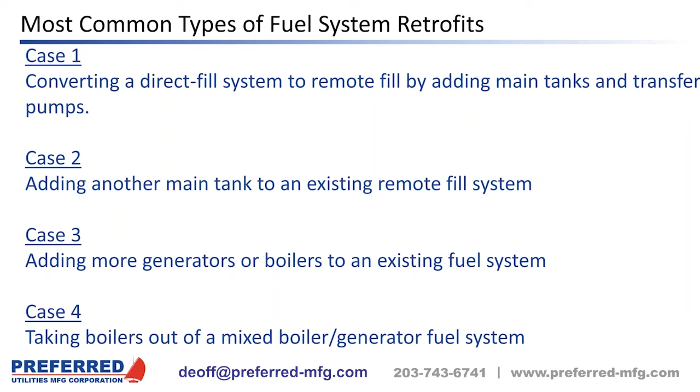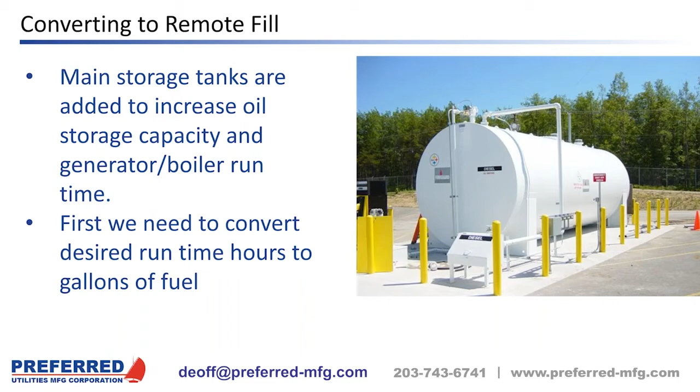The first thing we do is convert the desired runtime hours to gallons of diesel. It's an easy calculation, but people unfamiliar with tanks might forget that you can only fill a main tank to 90% full, and there is some oil at the bottom of the tank that isn't usable either, since the drop tubes don't go all the way to the bottom. Preferred has a web app that makes this calculation even easier—you enter the generators and their kW, the desired runtime, and the percentages at the top and bottom of the tank you can't use, and it tells you the nominal tank gallons you need.

Then you need to determine how many main tanks to use. One large tank is the most economical and may hold enough fuel, but there are reasons why you may want more tanks. The first reason is redundancy—there are a few things that can go wrong with a main tank to make it temporarily unavailable, so two tanks are more reliable than one. Also, available real estate—it may be easier to fit more smaller tanks than one large tank, even if it's a little more expensive. And finally, there may be transportation and rigging issues—it may be impossible to get one large tank to the site and into position, so you'll have to use two or more smaller tanks.

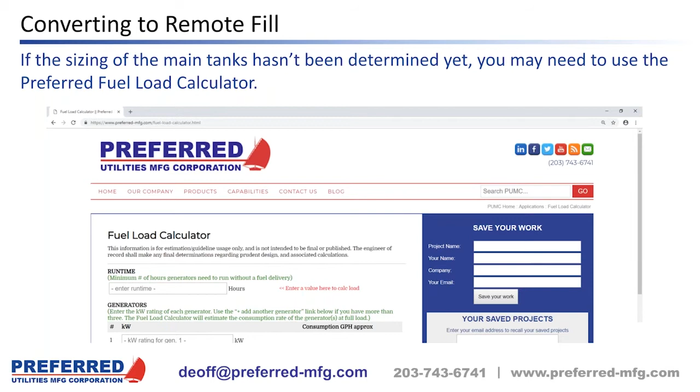Here's where you can find the preferred fuel load calculator. Again, it's not brain surgery, but this app does this calculation for you quickly and easily.

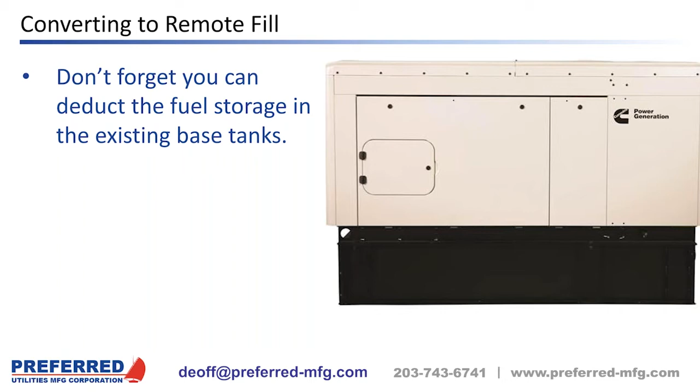When you are calculating the amount of diesel you'll need to meet your runtime requirements, don't forget to include the oil in the existing day tanks or belly tanks. A project I did last winter involved adding two 20,000 gallon main storage tanks to a facility that had 2,500 gallon base tanks. 2,500 gallons times 6 generators is a lot of fuel, and you can subtract that off your runtime hours. However, all this fuel didn't get them through the February freeze last year, so they decided to add main storage tanks.

So we know how big our main storage tanks need to be, and we know how many main tanks we're going to have. Next, we need to size the transfer pumps that will pull the fuel out of the main tanks and push it into the generator day tanks or belly tanks.

Generators consume about 7 gallons per hour for every 100 kW of capacity, or you can just multiply the generator kW by 0.07. You want to apply a generous safety factor because you want to be able to top off a day tank or belly tank relatively quickly and let the supply pump cycle off. Preferred will typically apply a safety factor of 3.0 to 4.0 on top of generator consumption, then calculate how long it takes each pump to go from the 50% pump-on level to the 80% pump-off level, and make sure we can top off a tank in a reasonable amount of time.

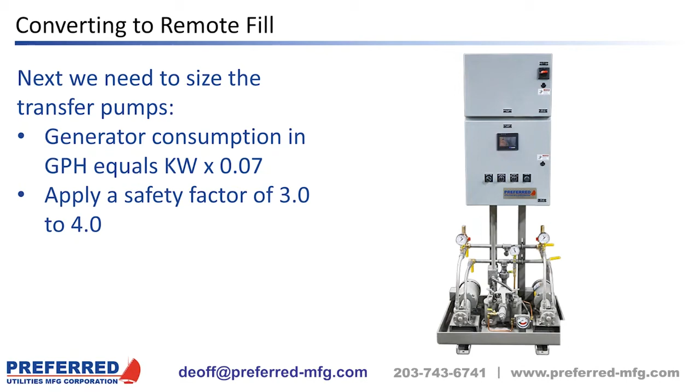Don't forget, we're talking about relatively small motors, and there's not a big price difference between one pump size and the next size up, so don't be afraid to apply a generous safety factor to the size of the transfer pumps.

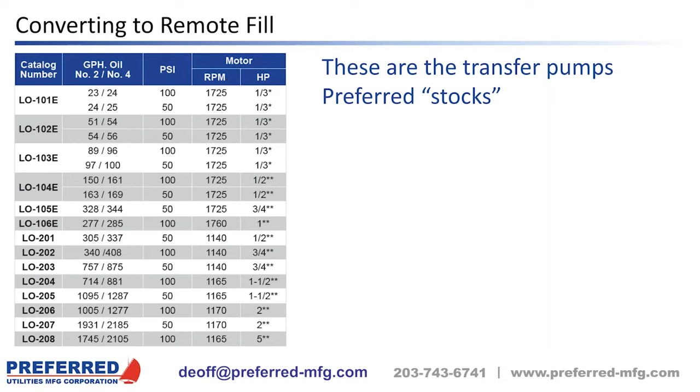Preferred catalogs and tries to stock pump sets from 23 gallons per hour up to 1931 gallons per hour. We can make larger pump sets, but they're just not in our catalog. We also have rotary screw pumps available for high-rise applications. So these are the available pumps that we can use for an off-the-shelf pump set.

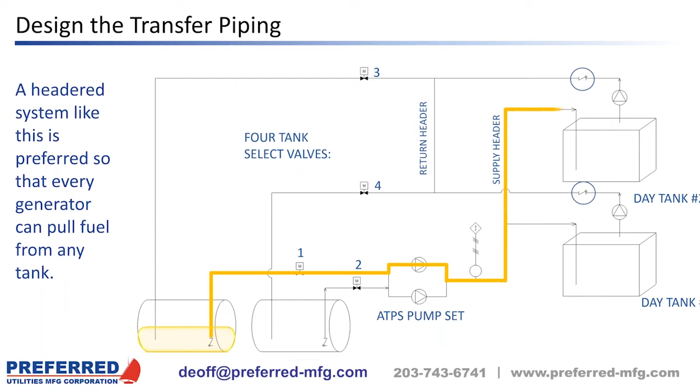Now that you know the size of the transfer pumps, it's time to design the fuel transfer piping. The diagram here shows how we would like to see the transfer piping done. Each day tank should be able to use either pump, and it should be able to pull fuel from either main tank. This way, a failure of a single pump or single main tank doesn't take down the generators.

Tank select valves, usually motorized ball valves with end switches, determine which main tank is in service. We always want to pull from one tank and return to the same tank. This way, we can't use the fuel in one tank to overfill another tank.

We have customers that say they want to be able to equalize the level in multiple tanks, or just want the ability to move fuel from one tank to another. However, our customers that have lived through long generator runs have found the best sequence is usually to pull from one tank until it is nearly empty, then switch over to another tank and call a truck or several trucks to fill the low tank. Then if they have a filtration system installed, they polish the tank with the new fuel before they put that tank into operation. Just in case you get a bad batch of fuel, which happens very, very rarely, it's a good idea to polish new fuel before you use it.

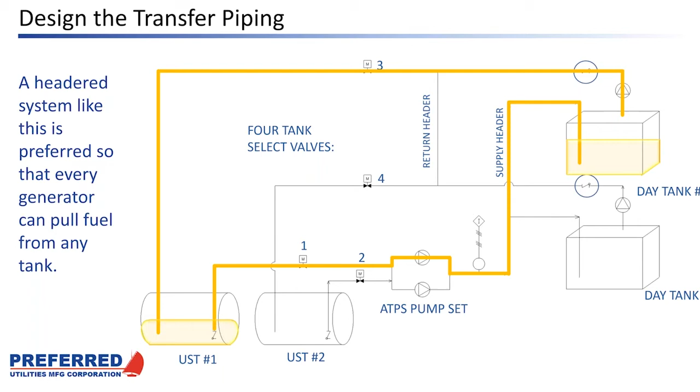This sequence makes it more likely that a customer will be able to accommodate a full truck and all of their fuel is polished before it is used, and it keeps the fuel turned over. After Hurricane Rita, a preferred customer in South Texas was on generator power for 14 days using this exact sequence.

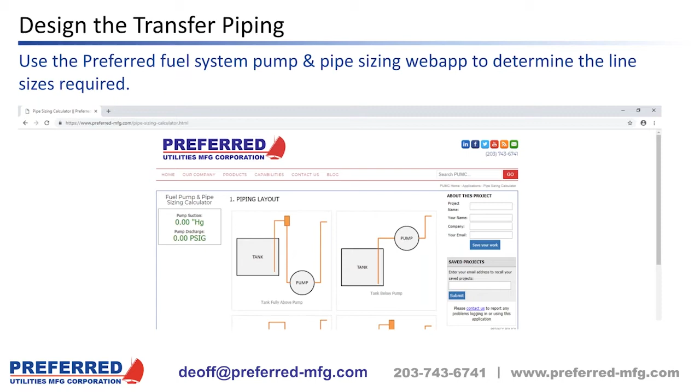So you can use the preferred fuel system pump and pipe sizing web app to help determine the size of the suction lines, discharge lines, strainers, and anti-siphon valves for the new system. You can find the preferred fuel system pump and pipe sizing program by Googling preferred sizing calculator or preferred pump and pipe sizing calculator, or as Dwight Schrute would say, search engine preferred pump and pipe sizing calculator.

So one other detail on the piping is we're going to need to add flow control manifolds to the day tanks, because before, when they were direct fill, the truck driver would pull right up to the belly tanks and fill them. The diagram shown here is the most basic form of flow control manifold.

If you like, you can build on this by adding a second solenoid valve. You can replace the solenoid valves with motorized valves. You can add a flow strainer. You can add a flow switch, or you can add a sight flow indicator. But what you see here is the most basic type of flow control manifold.

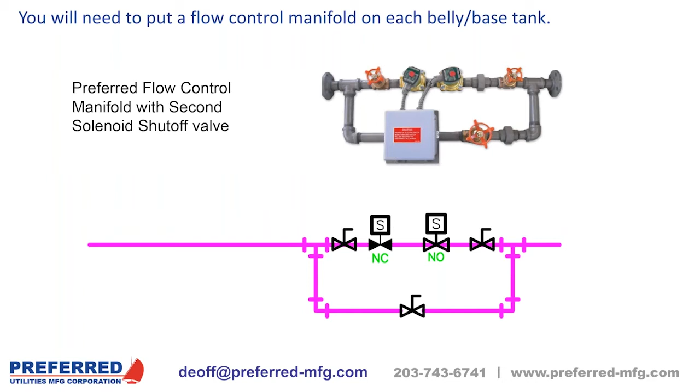The 3-valve manifold around the solenoid valve is very important. It lets you replace a solenoid valve without interrupting fuel supply to the generator. It also allows you to open the bypass valve and put a pump in hand to fill a generator in the event of a controls failure.

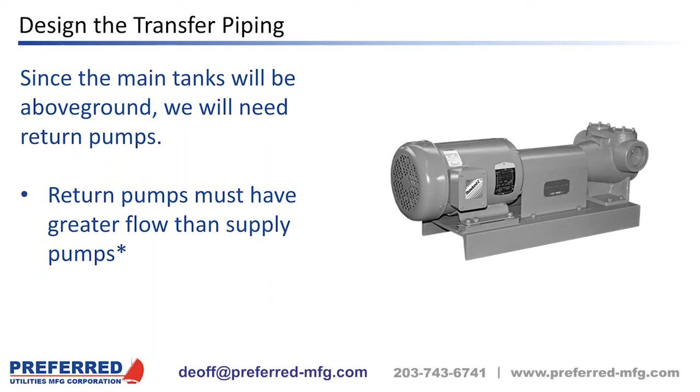I've never done a retrofit like this with underground storage tanks, so most likely you will be adding above ground main storage tanks, and gravity return won't work, so you'll need to put a return pump on each belly tank. These are the return pumps preferred offers. In most cases, the 15 PSI discharge pumps will work, but you should check the pressure required to get the fuel back to the main tank.

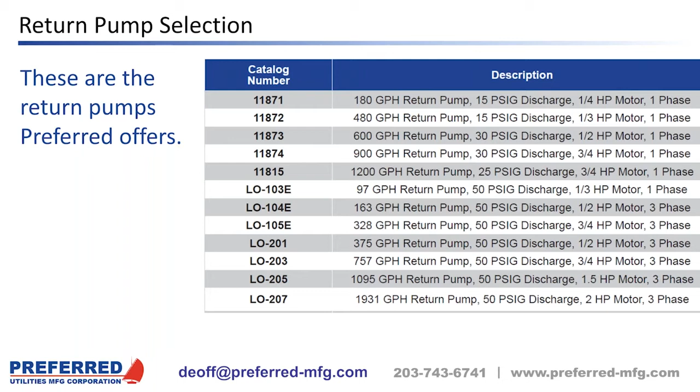If you have any vertical distance between the belly tank and the main tank, that might put you into a 50 PSI discharge pump. But if everything's on the same level, you can usually get by with a 15 PSI discharge, smaller pumps. Pumps and piping come naturally to us mechanical engineers, but the controls involved in a fuel system retrofit can make or break a retrofit project. Belly tanks or base tanks sold for direct fill applications usually will not have enough float switches for remote fill applications.

Most companies supplying pump set controls, Preferred included, will not reuse existing belly tank float switches and controls. Often day tanks come with a little control package that might close a contact to let a pump control system know the day tank is calling for fuel. In most instances, Preferred will insist on putting our own float switches in the tanks. Overfilling a tank is a big deal, and we put a lot of thought into how we prevent overfills.

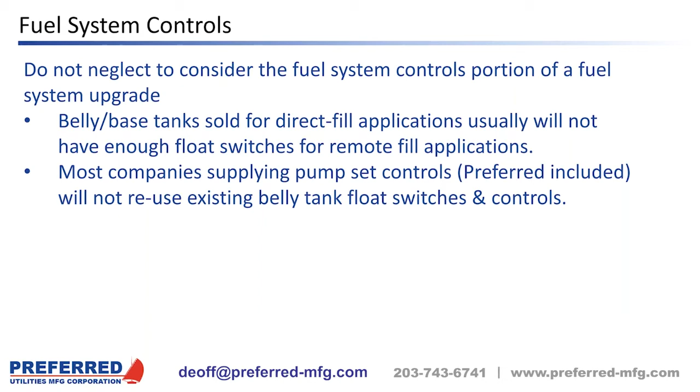This is the outline of the sequence Preferred uses for filling day tanks. When the tank level gets down to 50%, we bring on a supply pump and open the fill valve and start filling up the tank. At 80%, the fill valve de-energizes, and if no other day tanks are calling for fuel, the supply pump shuts off. If the fuel level gets to 90%, we sound the alarm, energize the return pump, and hardwire de-energize the fill solenoid.

We hardwire de-energize the fill solenoid just in case somebody's got a pump in manual, and we can turn off the pump regardless of what anybody has done to the controls. If the fuel level gets down to 40%, we sound the alarm and energize both supply pumps to increase the flow of fuel to the day tank.

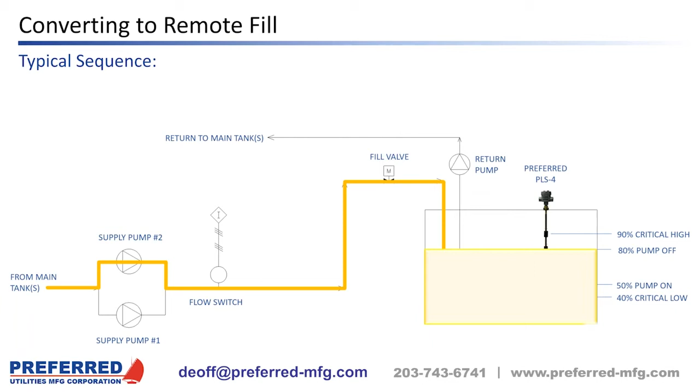For a retrofit, the key is we need 4 float switches in the belly tank. Most belly tanks purchased for direct fill applications will not have enough float switches for remote filling. And the OEM float switches are sometimes really cheap plastic assemblies we're afraid to reuse.

So Preferred is going to insist on putting our own version of float switches in the tank. It's our PLS4, PLS series. So if it has 4 float switches, it's a PLS4. If the base tank is at least 14 inches deep, we can use 1 PLS4. Otherwise, we'll use 2 PLS2s.

PLS switches are 1¼ inch NPT male connections, so we need 1 or 2 openings in the belly tank, at least 1¼ inch NPT. You need to inspect the existing day tanks to ensure there are enough openings. And if you are specifying a new day tank, belly tank, or base tank, insist on extra spare openings of at least 2 inch NPT that are accessible after the engine is put on top of the tank.

And that's it. Except for the changes inside the belly tanks, this is almost like starting from scratch with a new fuel system. So from a design perspective, going from direct fill to remote fill is very similar to starting a new fuel system design from scratch.

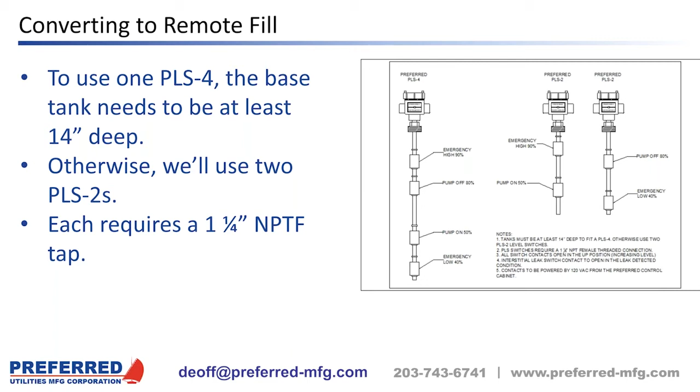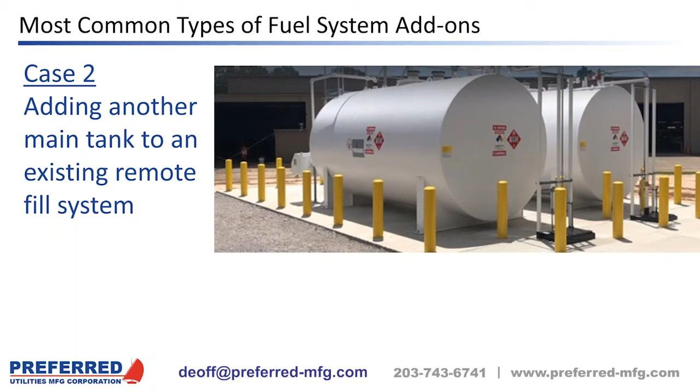So case 2, adding another main tank to an existing remote fill system. We also see facilities that have at least 1 main tank and a remote fueling system already that need to add another main tank to increase their diesel storage and runtime.

Ideally, we want to add the new tank in parallel with the existing tanks as shown. When we have 2 or more tanks, we want them to be connected using a suction header. This way, any day tank can use any pump to pull fuel from any tank. Redundancy is a good thing.

There are a lot of reasons why the new tank should be added in parallel. The first is simplicity of design. Also, we want the ability for any generator to pull fuel from any main tank. We want true redundancy. Finally, one tank can be emptied and then refilled and polished while the generators run from another tank. With Preferred Nodenet controls, it's easy to add another tank in parallel. We really want to try to avoid doing tank-to-tank fuel transfer.

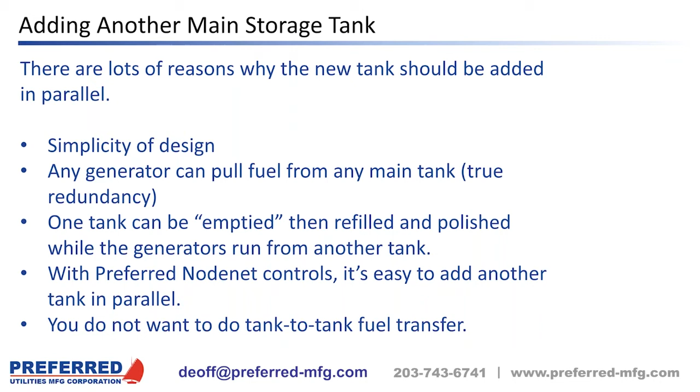Bear in mind, the new tank will need its own tank gauging and leak detection system, or it may be able to be added on to the existing tank gauge and leak detection system. A lot of the gas station type commercial tank gauges are built to handle many tanks, and sometimes the IO is already there to do another tank.

If the tank select valves are manually operated, no other changes to the controls are required. However, if these valves are to be automated, you may need to check with the existing pump controls company to see if they can handle the increased IO, and you may need a program change. Call the supplier of the pump controls, tell them what you intend to do, and ask them to quote you the change.

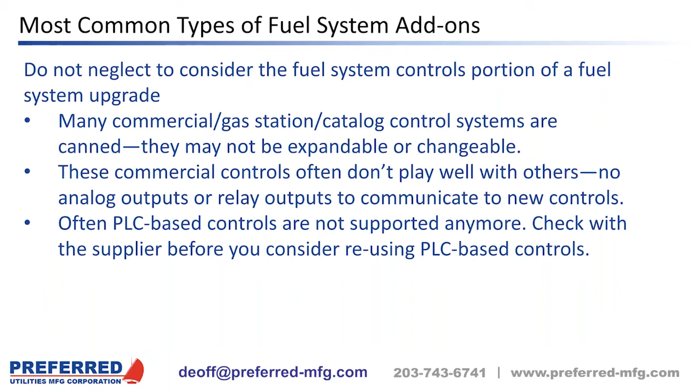A couple of slides back, we said we don't want to do tank-to-tank fuel transfer, but in some instances, it just isn't practical to add another main storage tank in parallel. Sometimes we're forced to put a new tank in series with an existing tank. If that is the case, we need to do tank-to-tank fuel transfer.

Positive displacement pumps or submersible pumps must be added with the new tank to get the fuel from the new tank to the old tank. The fuel transfer process can be manually or automatically initiated.

However, the pump controls must automatically prevent overfilling the old tank. What I mean by this is tank-to-tank fuel transfer can be started manually, but the sequence to prevent overfilling the downstream tank is automated and can't be bypassed. Human error is a common cause of tank overfills.

So a PLS2 is required in the old tank we're going to be filling, so we need to make sure there's an unused tap in the old tank that's at least 1.25 NPT. Sometimes it's possible to add another tap to a main storage tank.

It may be possible to add the tank-to-tank fuel transfer to the existing pump controls. Check with the controls manufacturer. Otherwise, Preferred will put a NodeNet controller on the new tank as part of the tank gauge and leak detection system, and the new controller will handle the tank-to-tank fuel transfer.

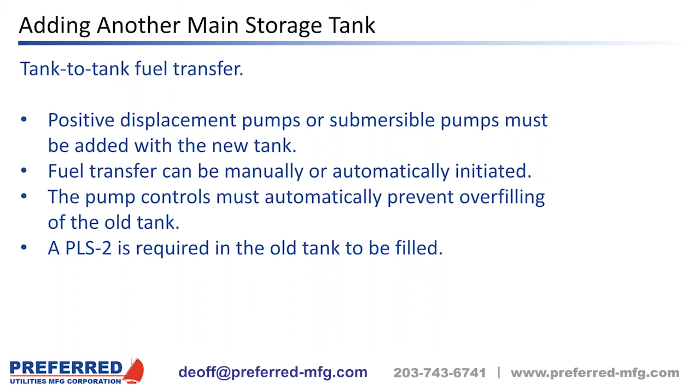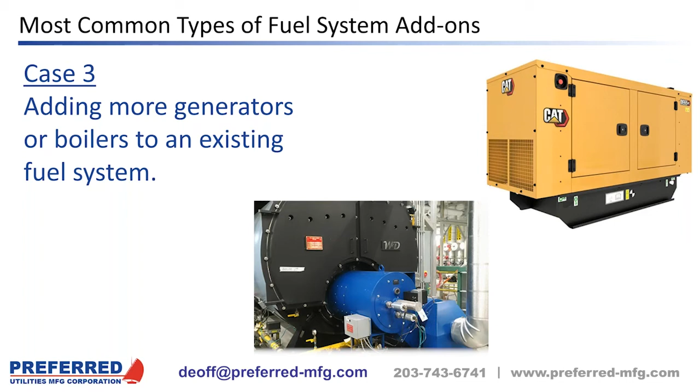Okay, case 3, adding more generators or boilers to an existing fuel system. This is the tough one. If a facility wants to add more generators or boilers to an existing fuel system, this should be designed by an engineer or done by a trusted fuel system contractor, and that contractor should really call Preferred to assist with the engineering.

This project should start with an engineering review of the existing system. You need to determine first how many bungs are in each of the main tanks. Determine the existing line sizes and sketch out the entire suction and discharge piping system. Get the pump curves for the existing transfer pumps and figure out how much the existing pumps will flow.

You can use the Preferred pump and pipe sizing app to determine flow capacities of the existing piping and locate possible choke points.

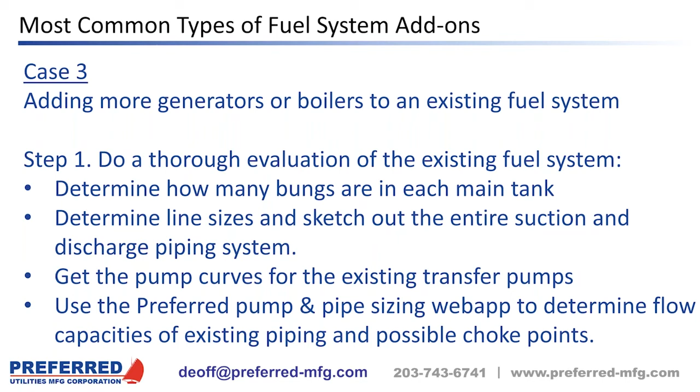You need to determine the flow requirements of the new equipment. The boiler nameplates should tell you that, or you can use our rule of thumb of 7 gallons per hour for every 100 kW of generator capacity.

If the existing pumps and piping can handle the new consumption, then you got off easy. And this is part of the reason we recommend safety factors of 3 to 4 on supply pumps. So now the engineer who put a big safety factor on the original supply pumps, and they can be reused, that engineer is a hero now.

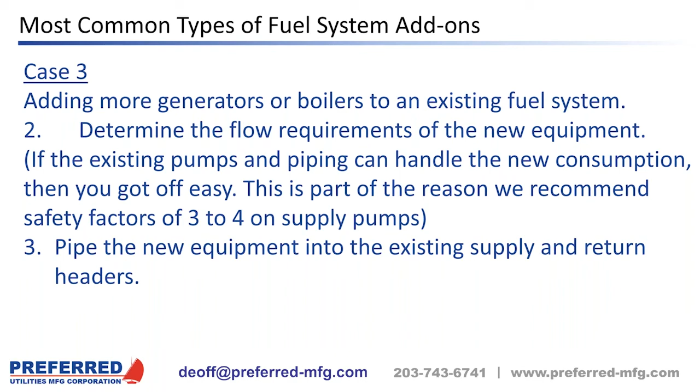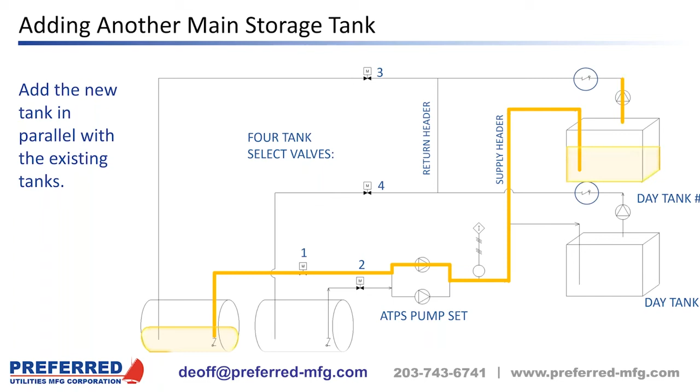You want to pipe the new equipment in parallel into the existing supply and return headers according to our perfect piping schematic you've seen about 4 times now.

What if the existing supply pumps don't have enough capacity for the new consumption you're adding? You can replace existing supply pumps with larger pumps and pipe new generators or boilers into the existing supply and return headers. There is a cost associated with the new pump set, but the piping is easy.

Since you already traced the suction and discharge piping, you have the information to calculate if the existing piping can handle the increased flow of larger supply pumps.

Or you can add another pump set in parallel with the existing pumps and tie it into the existing supply and return headers. This is relatively clean as well from a piping perspective and adds redundancy to the system.

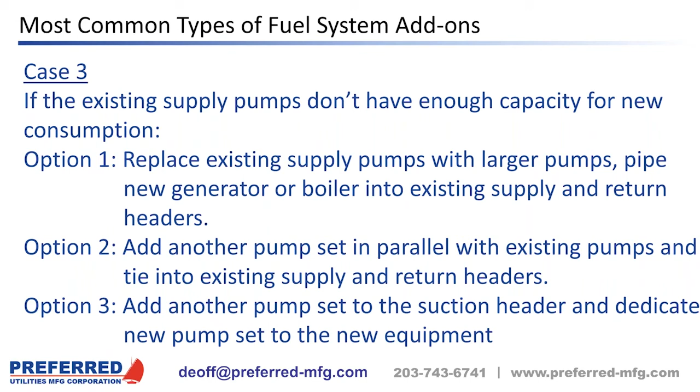Or you can add another pump set to the suction header and dedicate the new pump set to the new equipment. With this option, you will be providing new discharge piping, but using the existing suction piping. So you will need to ensure the existing suction piping can handle the increased flow.

If the suction piping becomes a choke point, it will have to be replaced, or the new pump set can have its own dedicated suction line if there is room to add more drop tubes to the existing main tank.

I'm not a fan of dedicating a pump set or a main tank to a particular generator because you lose some redundancy. You can get into a situation where if a pump set fails, you'll have fuel on hand, pumps move the fuel, but those pumps aren't piped into the new generator tank. So a generator is cut off from its available fuel. This is an unlikely scenario, but we want to plan for it and avoid it if at all possible.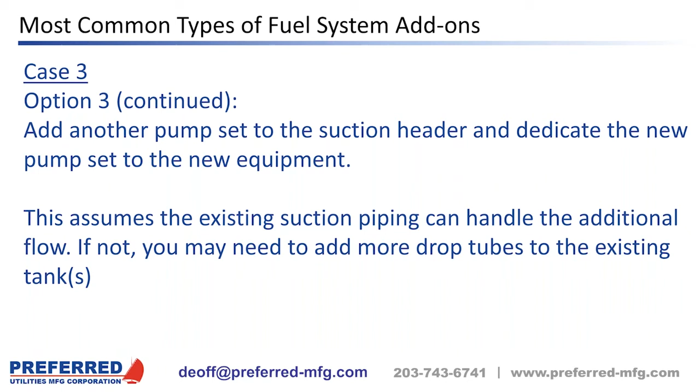A common reason to dedicate a pump set to a generator or generators is a minimum runtime requirement for the generators. However, this can be done easily with software. For example, hospitals in Texas are required to have 24 hours of fuel on hand for their generators.

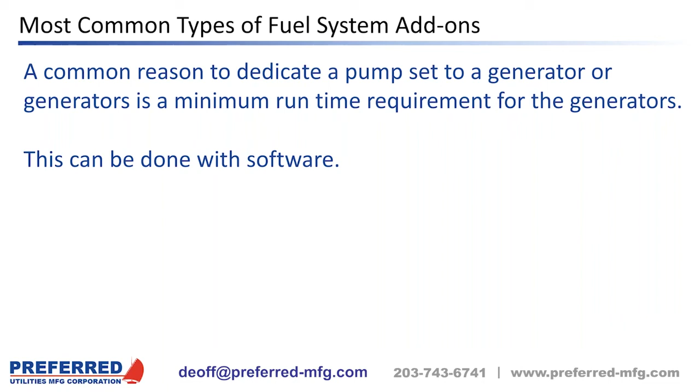Sometimes hospitals will dedicate a main tank to their generators to reserve this 24 hours of fuel. Sometimes the drop tubes for the boilers are cut short, so the boilers can't use the last 24 hours of generator fuel. And then the drop tubes for the generators go all the way down, nearly to the bottom of the tank. However, the easiest way to do this is just to have Preferred program the pump controls to ignore boiler run commands if the fuel level gets below that 24-hour level that's reserved for the generators.

So finally, case 4, and case 4 comes from Alex Canny, who works in the Northeast, and this is taking boilers out of a mixed boiler generator fuel system.

This is happening in the Northeast as the distribution system for natural gas is expanded. Hospitals are converting their boilers to gas firing and taking them out of their fuel oil supply system. This may require no changes to the fuel system or pump controls, but now that the biggest users of diesel fuel are out of commission, the fuel just sits and degrades. Even with periodic generator testing, most generator-only fuel systems do not burn enough fuel to keep their fuel fresh.

We've seen facilities leave their main fuel tanks half empty or less to help keep their fuel from getting old. But half empty tanks condense more water vapor than full tanks, and water infiltration is the main reason diesel fuel goes bad.

We've also seen customers replace their main tanks with smaller tanks. This is expensive, and at the end of the day, the facility has less fuel on hand for an emergency.

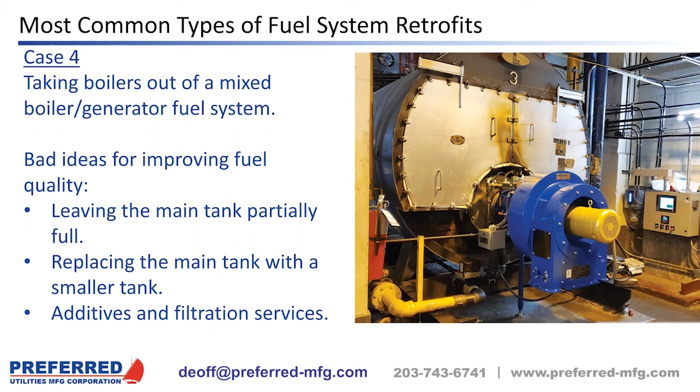Fuel additives can prolong the life of diesel fuel, and there are companies with portable filtration systems that can polish a facility's fuel, and this approach works if it is followed. However, as consulting engineers, this process is out of your control.

What we recommend is adding a polishing system to the existing main tank or main tanks that will keep the fuel fresh indefinitely. Preferred polishers range from 300 gallons per hour to 1200 gallons per hour, and the finer filter element can be as fine as 1 micron. Polishers are pricey too, but they are a convenient way to keep diesel fuel fresh.

And now that diesel fuel is almost as expensive as beer, you want to treat it right so it doesn't go bad.